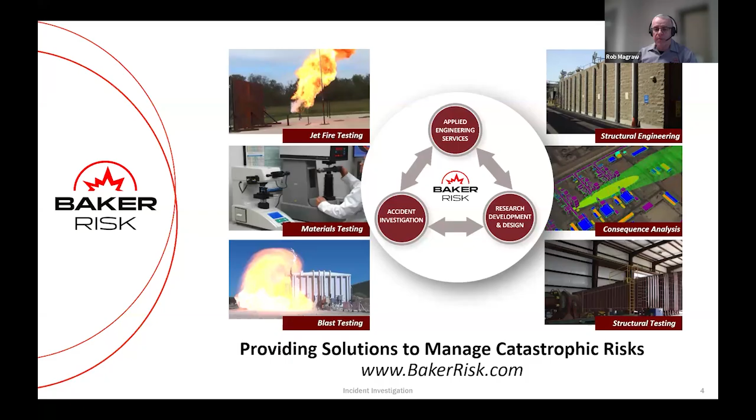Okay, so incident investigation. So the first question is why do we investigate? Why do we need to bother investigating? So we want to demonstrate this by looking at some examples of where things have gone wrong. Often events that get cited are the likes of Flixborough, Buncefield, Piper Alpha, Texas City, etc. But what I want to show here is some more recent events that demonstrate that industries are still having these major accidents on a regular basis.

For the first couple of these examples, BakerRisk personnel were actually boots on the ground investigating what went wrong. So clearly you'll see from these accidents that investigations are still in demand. But the question is, if we're investigating these incidents and they're still occurring, what is it we're missing? What are we not learning from these investigations? And we'll hopefully bring that up as we go through.

So the first event here happened at the Husky refinery in Wisconsin, USA, on April 26, 2018. Now, this event clearly demonstrates how real events in the real world can escalate in unexpected ways that are often far more complex than the simplistic scenarios that we might evaluate for a QRA or even use as the basis for our emergency planning arrangements.

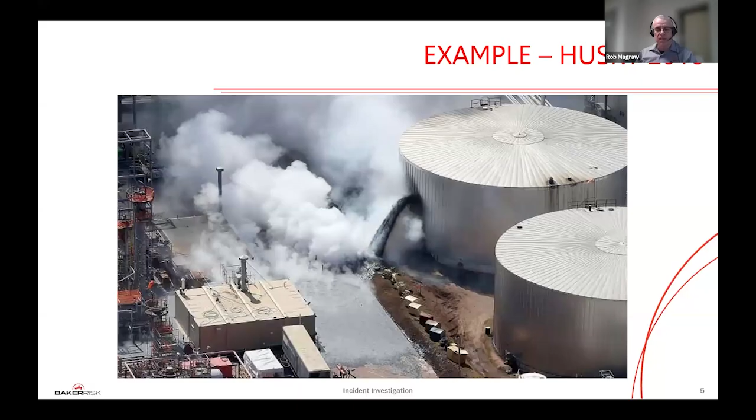So this is a video of the aftermath. Luckily, in this case, there were no fatalities. However, there were 11 OSHA recordable injuries and a downtime of approximately 2 years. The resulting payout from the insurers at the end of 2018 was approaching $500 million. And that covered plant damage, business interruption, and cleanup costs.

The next example we'll look at is Philadelphia Energy Solutions Refinery in Pennsylvania, USA. This was the 21st of June, 2019. And this is another event that escalated. An initial fire resulted in a major explosion. And in this screenshot, taken during that major explosion, you can see a section of process vessel being ejected. That piece of vessel actually landed on the other side of the adjacent river.

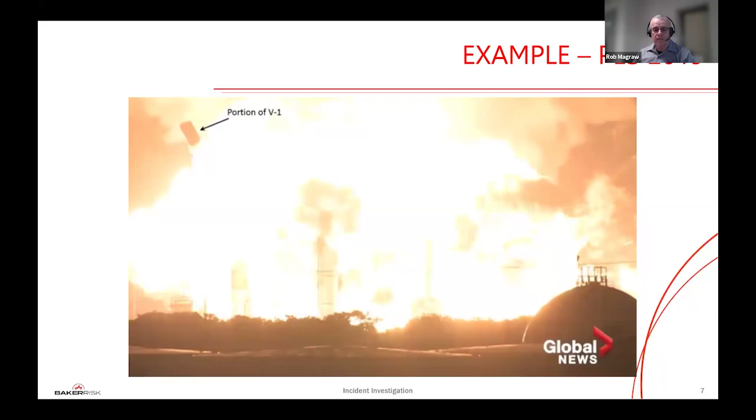So there goes the explosion and the vessel flying out. The consequences of this event, again luckily no fatalities, surprisingly 5 injuries, around $1.25 billion in insured losses, including around $1 billion in plant damage and $250 million in business interruption.

As a result of this event, PES, Philadelphia Energy Solutions, went bankrupt. The refinery was closed, and if you look at the site on Google Earth now, you'll see it's completely demolished, and it's just a flat area. So the impact of these events on the business can be massive, as well as the immediate safety impacts.

Slightly different event. This demonstrates these events don't just happen at production and manufacturing facilities, but actually can occur anywhere that high hazard materials are present.

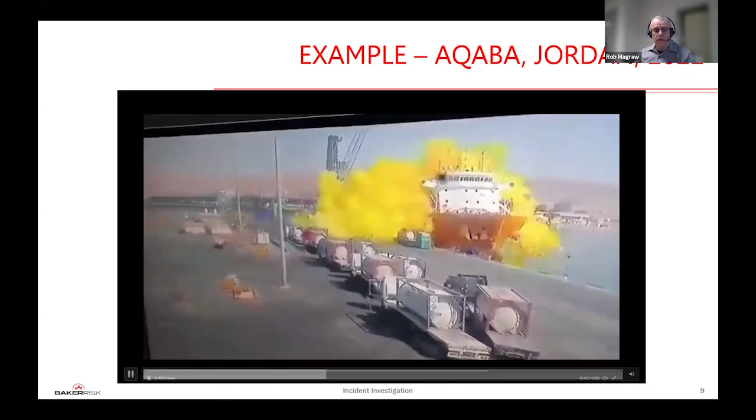Some of you may recognize this. This is the port of Aqaba in Jordan. The event happened June the 27th, 2022. An ISO container, you can see here, is being lowered, containing 25 tons of chlorine. It's being lowered onto the ship. The lifting system failed and it dropped, resulting in 13 fatalities and more than 256 injuries. And what's incredible about this is the speed with which that toxic cloud spreads.

Here you can see the ISO container that fell, and the punctures from landing on the support structure on the vessel punctured a hole in the ISO tank.

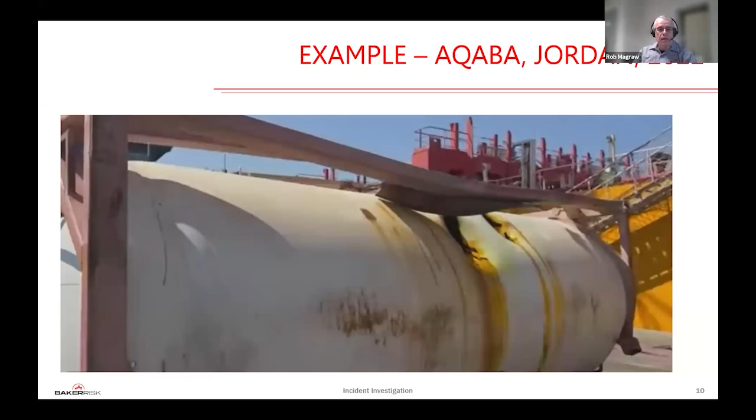An even more recent example includes a major explosion at a chemical plant operated by Shandong Youdao Chemicals in China, May 27th of this year. The details are pretty scant, but it's believed to be between 5 and 11 fatalities, 19 injured, and you can see from the picture major damage to the facility itself and also lots of adjoining facilities as well.

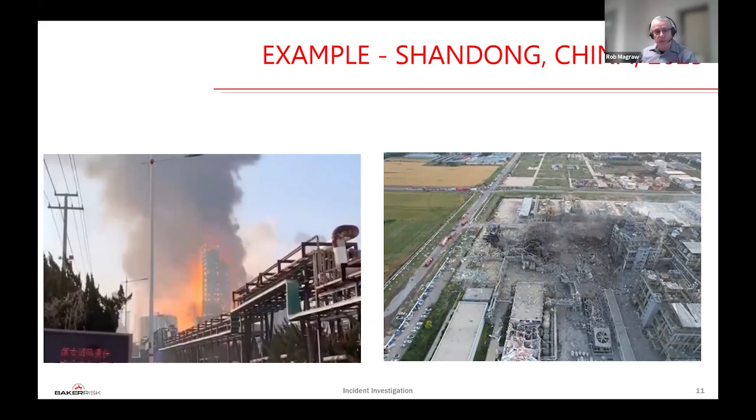Back to the USA. This is Smitty's lubrication plant in Roseland, Louisiana, August 22nd, 2025. And you can see there's a pretty well-developed fire in a tank farm. Took 2 days to extinguish. Just look at that video and look how closely spaced those tanks are and how close the bunding is to the tank. Much cleanup work to do after this event.

So there's a history of major accidents and a continuation of those accidents. So why do we investigate? Here's a list of some of the reasons. It's not an exhaustive list. There are also lots of other things.

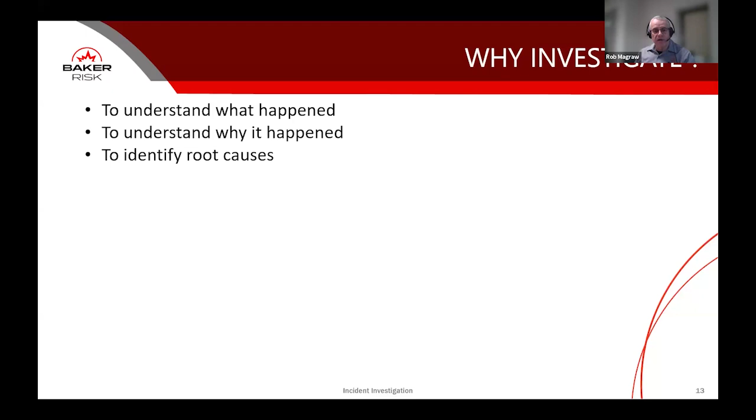First of all, we want to understand what happened. Once we understand what happened, we can look at why it happened. When we understand why it happened, we can identify the root causes behind those immediate causes. And then once we've done that, we can take action to prevent it reoccurring.

This is the most important thing. You can do root cause analysis to the end of time, but if you don't do anything with the results, nothing is going to change. So that's the critical point.

So we can take that learning and we can share it amongst our own organizations. We can share it outside our facility to others in industry. And that learning helps develop the safety culture within the organization to reduce the likelihood of similar events happening in the future.

And the second to last point there, to satisfy stakeholder needs, we will cover in more detail as we go forward. But as I say, there's lots of others in terms of legal, insurance, all those lots of other reasons why you might want to investigate an incident.

So looking at the legal side of things, looking at the European Union first, where we've got high hazard regulation under a directive commonly known as Seveso. We're currently in version Seveso 3. And this directive from the EU must be implemented by all EU member states.

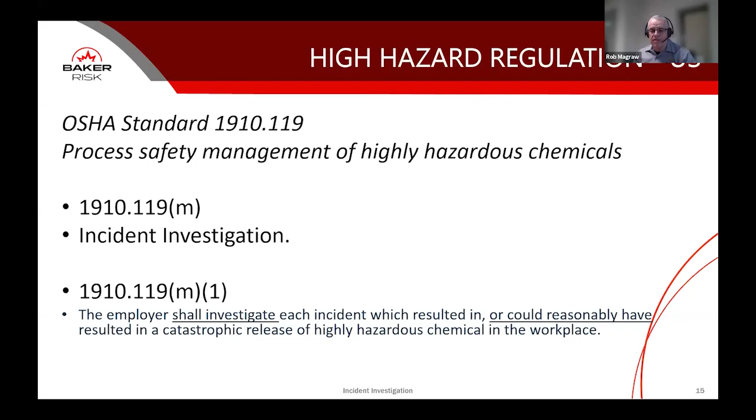So that's European Union. In the US, we've got the OSHA standard 1910-119. This is process safety management. And again, there's a whole section in there on incident investigation. I've just pulled out one clause that says employers shall investigate each incident. And the important thing on this one is that they've said it's not just incidents which have resulted in, but also could reasonably have. So this is putting a duty on the operator to investigate those events that could have resulted in a major accident.

Within Egypt, we've got the guidelines from the Ministry of Petroleum and Mineral Resources on incident notification, investigation, and reporting. Again, we're saying that operating companies shall openly investigate all incidents, preventing recurrence and driving continuous improvement. That same theme runs through all these guidelines.

If we look at what industry groups are saying, this is the risk-based process safety temple diagram from the CCPS, and you can see one of the key things for learning from experience is incident investigation. Other industry organizations, such as the Energy Institute, have a similar management framework - in the EI framework, element 19 is incident reporting and investigation.

So all the legislation and industry good practice are telling us the same thing: if something goes wrong, investigate it, find out what happened, and learn from that investigation.

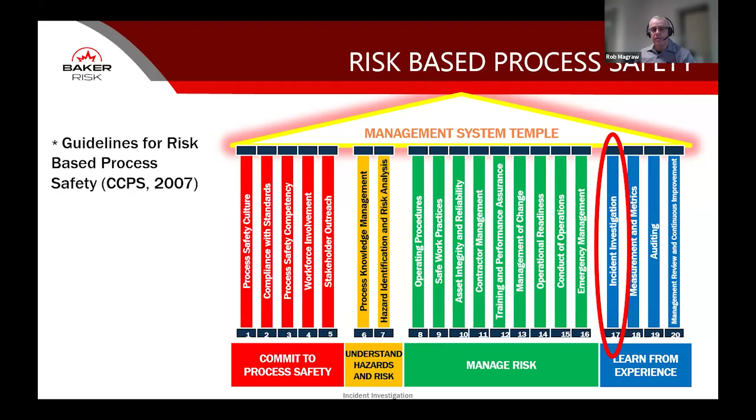Clearly, the operating company, the ones who've suffered the incident - so there might be a site level investigation and a corporate investigation. The owners of that business may be interested. There'll be other affected parties, could be employees who've suffered injuries. Similarly, contractors and third parties - any parties who may have been directly or indirectly involved in the event.

You've then got authorities - those with some sort of regulatory or oversight role, local authorities in the district where this happened, your regulatory authorities, and the emergency response organizations that may have responded to the event.

Clearly, at some point, insurers will probably be asked to contribute towards the loss, so they are going to be interested in what happened and why it happened. And then there are others - lawyers representing various stakeholders. If you've had a piece of equipment that is part of a licensed process, then the organization that licenses that is going to be interested in what happened and why, and many others, such as trade associations who may want to share information with others about that type of equipment or how to operate it, or not operate it.

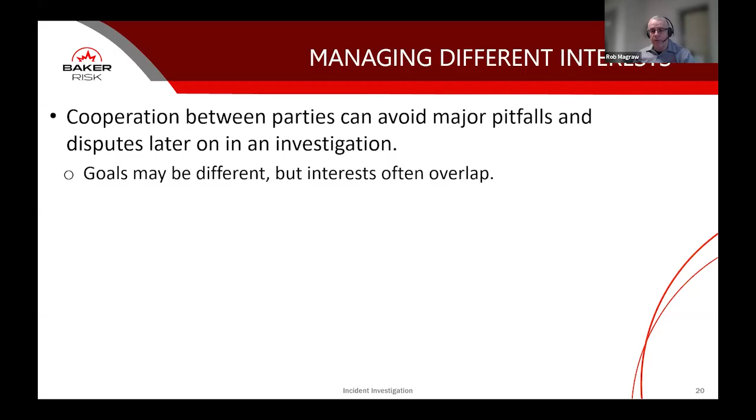One of the key things here is to develop a protocol - one that may help with complex tasks such as testing functionality of a piece of equipment, dismantling, or removing evidence from the site to somewhere else. Developing a protocol between interested parties can help clear blockages in those investigation processes.

So that is a very brief run through of why we still continue to need to investigate accidents, who the stakeholders might be, and what some of the pitfalls are. I'll now hand over to Roger, who will walk through the actual process and an example.

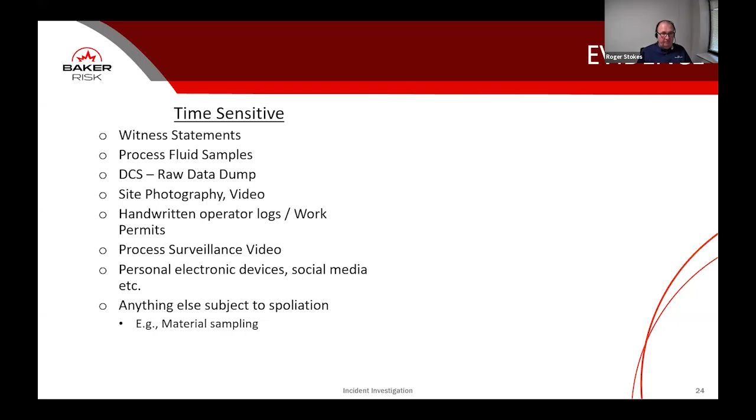Samples of fluid, data from the computer - sometimes you lose it very quickly, which can be a problem. The photography on the site and video, same issue. Handwritten logs, work permits, surveillance video, etc. So all these things could be time sensitive.

You might have other stuff that's not as time sensitive, so photographs and video that can be preserved, data on the computer - but beware, it's amazing how many investigations I find where the data's written over in weeks or a month. Bits and pieces - preserve them, make sure we can take them and analyze them without them suffering from other deterioration. Records from labs and all the engineering data that we're all familiar with.

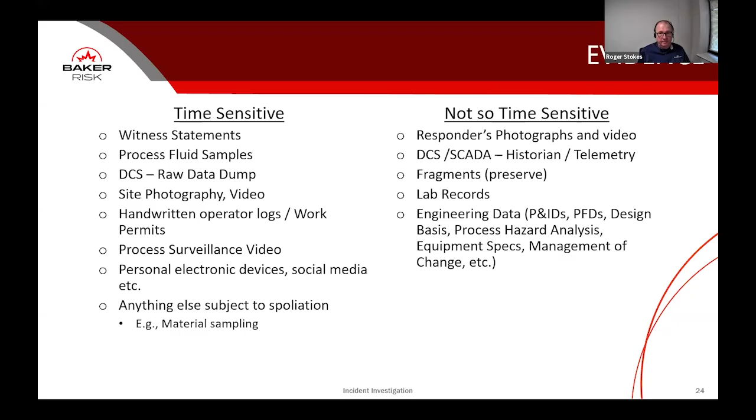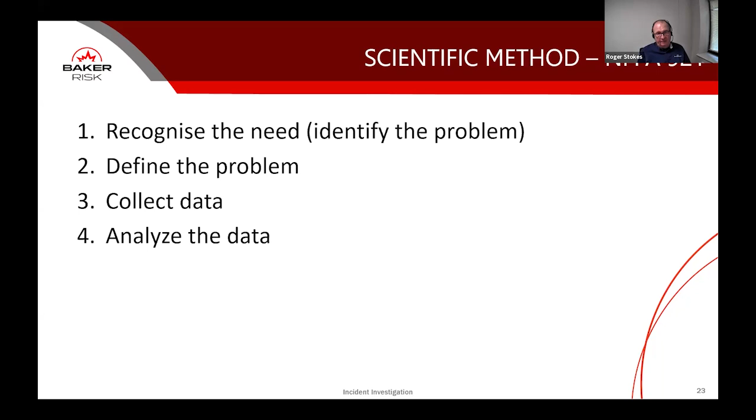The scientific method for investigations is based on NFPA 921, which starts off by saying, what's the need? What's the problem here? Let's define it. And then let's collect data. We then analyze the data we've collected, and then we develop a hypothesis called inductive reasoning - what could have happened, what may have led to this occurring?

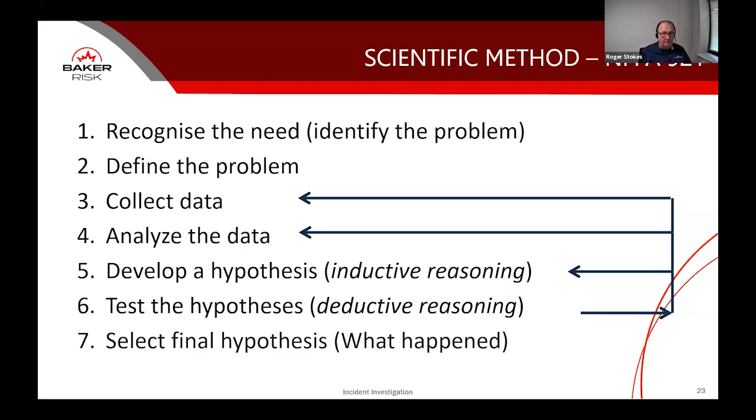There might be several hypotheses to start with, and then we need to test them. What do we need to demonstrate that this hypothesis could have occurred, or indeed might not have occurred? Let's test these, and we might come down to only one possible hypothesis - it might be two or three, that's not always the case. But there's feedback loops as we develop and test hypotheses - we might again get more data which we look at, and so forth. That's the scientific method. And of course, at the end, we then select the final hypothesis.

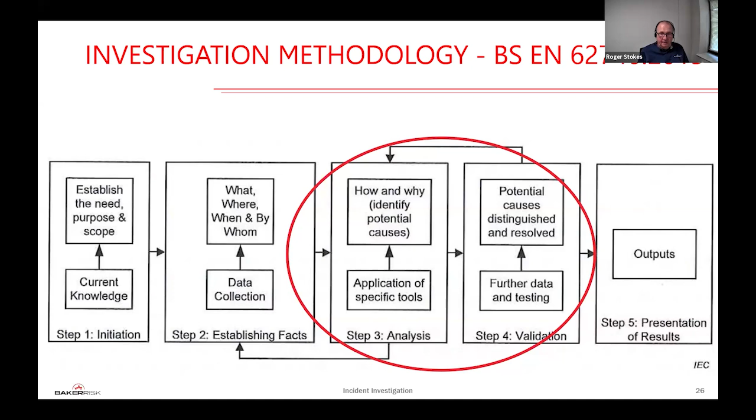This is another slide, the British Standard. It's a similar approach, using specific tools to identify the cause and using data to test that.

There's various terms for cause. I won't read through all of these in detail, but there's an immediate cause, and I think the third definition there is probably pretty good - the final act in a series of provocations that leads to a particular result. So the last thing that happened before it went bang - the pipe burst, the valve opened, whatever it is.

Then we have the underlying cause or causal factors, which could be defined as unsafe acts or unsafe conditions. It's something that contributed to the incident but wasn't the final event. So it could be system or organizational procedures, tests not carried out, etc.

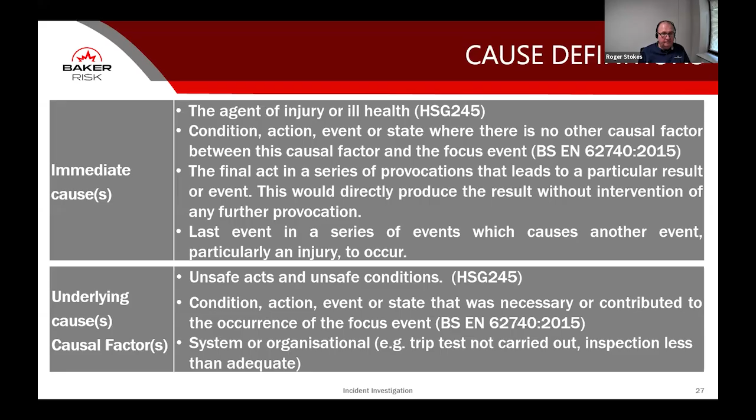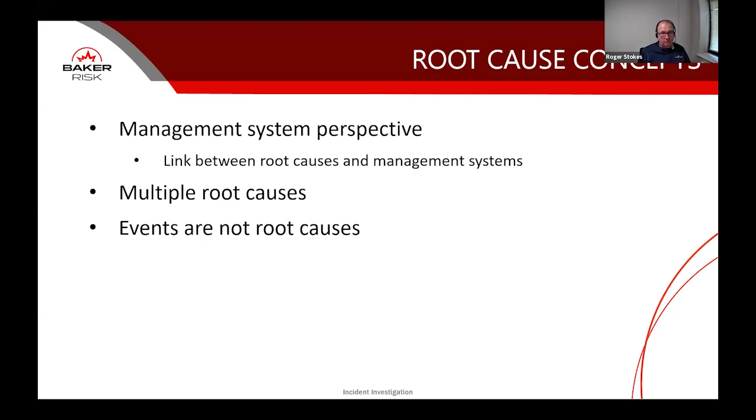So the root cause, the concept of root cause, it's a management system we're looking at, and there are usually multiple root causes. Remember, an event is not a root cause.

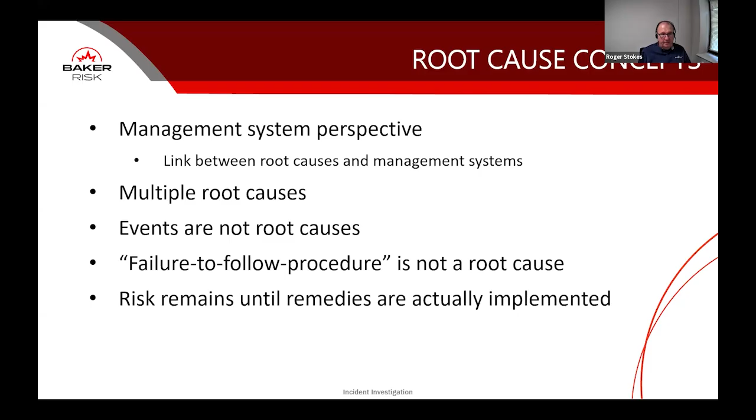Failure to follow procedure, for example, is not a root cause. Why didn't he follow the procedure? What are the systems behind that? And of course, the risk stays there until we've implemented the remedies.

So various methods to get to root cause. There's the 5 whys - you keep asking why until you run out of whys. There's a fishbone diagram, which gives you cause and effect. There's various forms of structured root cause analyses. It could be a logic tree or perhaps a predefined tree. One example is Taproot. BakerRisk has got a system called CATree, and there are many others.

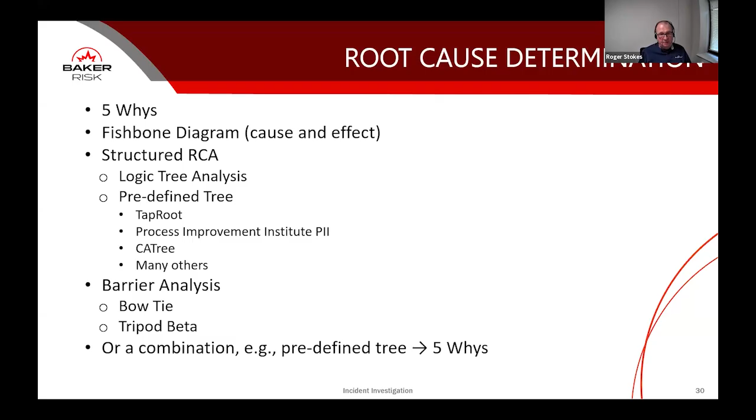Increasingly these days, we consider barrier analysis. What are the barriers? Which ones should have stood up? Which ones failed? And there's methods like Bowtie and EI's Energy Institute's Tripod Beta to look at that. Or you can use a combination. There's no firm rules on which system you use. You might have a combination, so you might have a predefined tree and then start asking whys beyond that.

So this is the case study. It's made up for this presentation. It involved an explosion and fire at a chemical plant, and we start with the timeline.

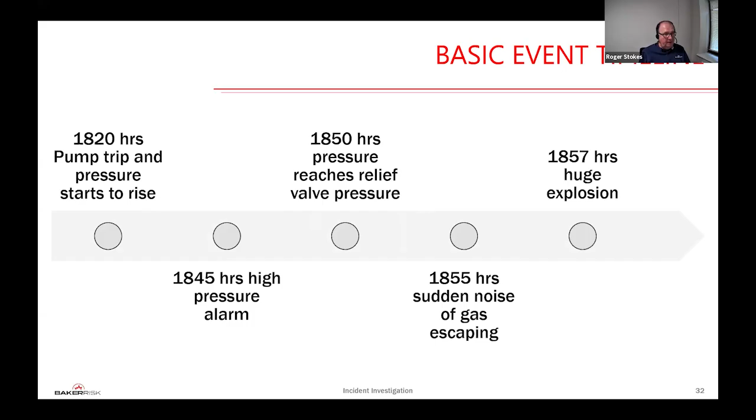So here we have a pump that tripped, followed by a high pressure alarm. The pressure goes up and reaches the relief valve pressure, and 5 minutes after that, there's a sudden sound of gas escaping, and 2 minutes after that, there's a huge and devastating explosion.

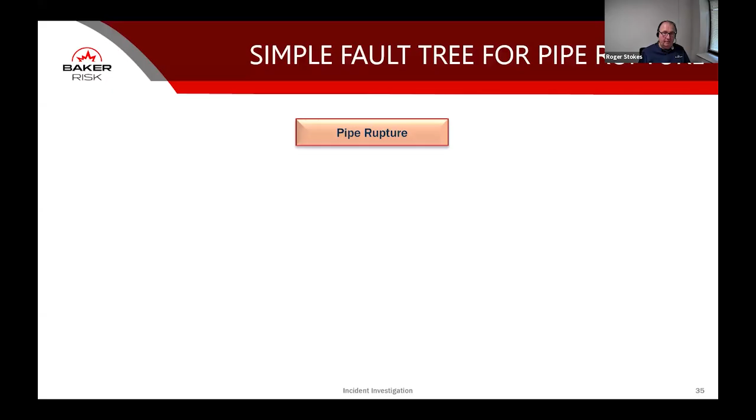But if it was a pipe failure, pipe rupture, let's look at a simple fault tree for analyzing that. We know we've got the pipe ruptured. We also know that the pressure went higher than normal, and that was because the pump tripped. But normally that shouldn't lead to a pipe rupture. There must be something else going on here.

So we start putting together our hypotheses. What might have caused this to happen? And this is one way of doing it, putting together a hypothesis matrix.

So the scenario we're looking at, maybe the pressure went too high. It exceeded the burst pressure of the pipe. And to verify that, you'd look at the records from the computer. You may do a metallurgical inspection of the pipe. And then you hypothesize, you look at your findings and you decide whether that's valid or not.

There might have been a loss of internal wall thickness. You do a metallurgical inspection to validate that. It could have been external corrosion. Again, do some metallurgy. Somebody might have put the wrong pipe materials in. That happens all too often. Could have been hit by a passing vehicle.

Let's look at the evidence of the pipe. Let's look at where vehicles were. There might be some security camera. Something fallen on it and caused it to rupture. Somebody accidentally cut into it. Let's look at the work permits and maintenance system. And then we look at all of this, so we'd analyze it.

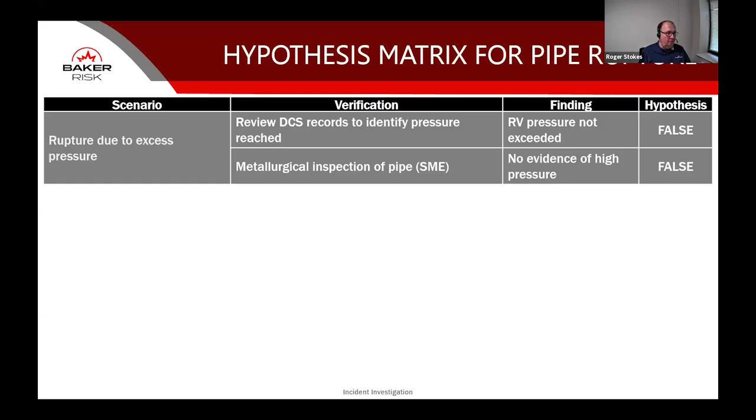So in this example, let's look at the rupture due to excess pressure. If we go to the findings column here, we find that the relief valve pressure has not been exceeded before the pipe ruptured. So it was within its design pressure. There's no evidence of high pressure being the immediate cause.

What about internal loss of wall thickness? We looked at the pipe. Yes, we had a loss of wall thickness due to corrosion. So that's one valid hypothesis.

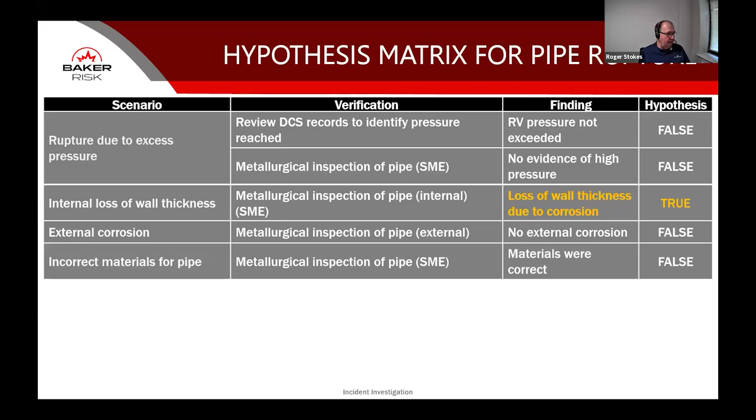What about external corrosion? No, there wasn't any. What about the materials of the pipe? Yep, they were correct, so it's not that. Was it hit? No, there was no sign of it being hit. Anything drop on it? No. So in this case, we've gone through and found one hypothesis which is valid - we've lost wall thickness on the inside of the pipe due to corrosion. Oh, sorry, last one - nobody accidentally cut into the line.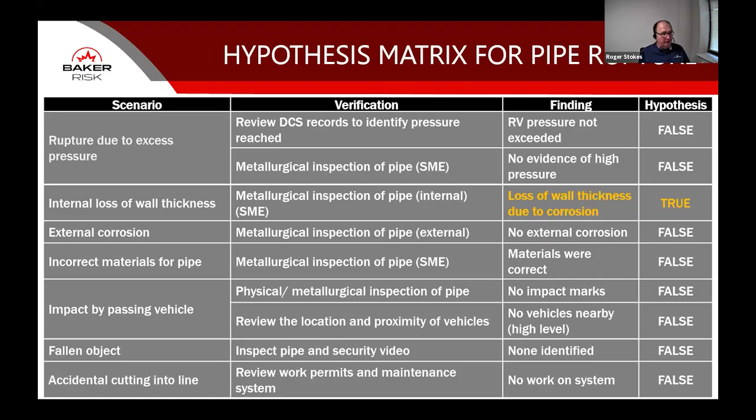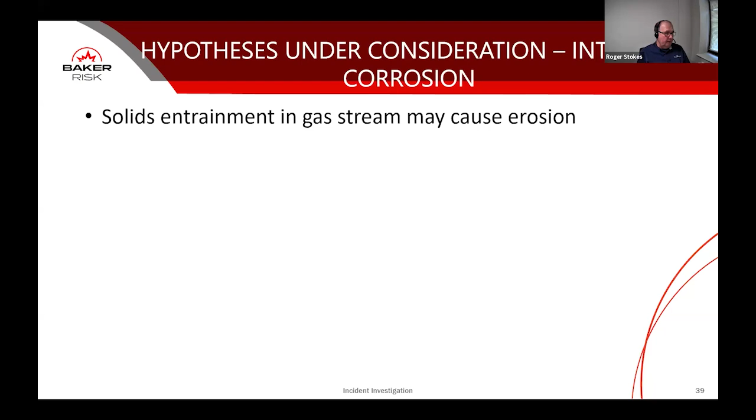So we have internal corrosion. We start asking, well, why have we got internal corrosion? It could be solids entrainment in the gas stream - that could be one hypothesis. It might be high moisture. It might be high temperature. It could be liquids accumulating at a low point. Maybe the thickness checks weren't accurate enough.

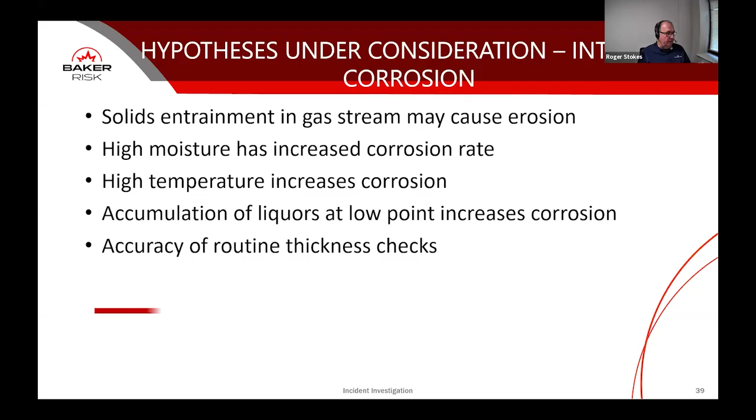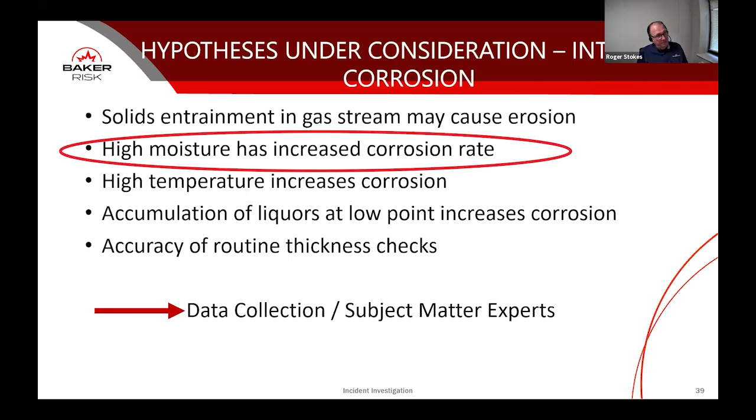So we look at all these hypotheses. We collect data, we go through, discuss it perhaps with subject matter experts. And we find actually here we have a situation where it was indeed high moisture that increased the corrosion rate.

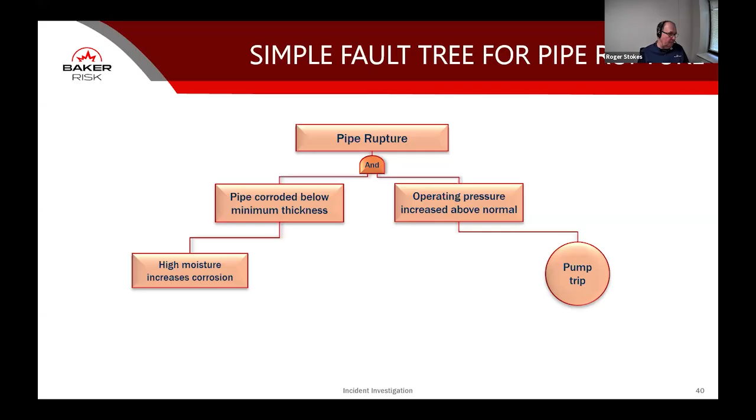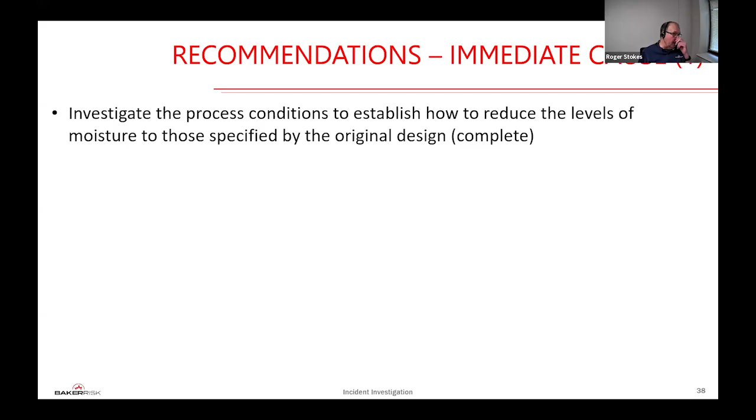So if we go back to our fault tree that we had earlier, we now know that the pipe corroded below minimum thickness, and this was as a result of high moisture. And so the recommendations you might make from that investigation so far would be to find out why we had high moisture, and look at and make sure and then reduce the levels of moisture to those specified by the original design.

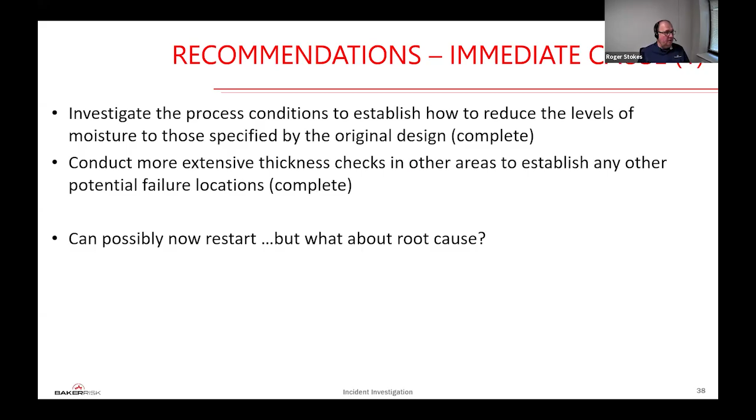We might then conduct more extensive thickness checks in other areas to see if there's any other possible failure location. And once we've done that, and maybe we can restart. We've repaired the pipe. We've checked everywhere else. We've reduced the moisture levels to the original design. But what about the root cause? We haven't got to that root cause at this stage, and there is another leg on the fault tree.

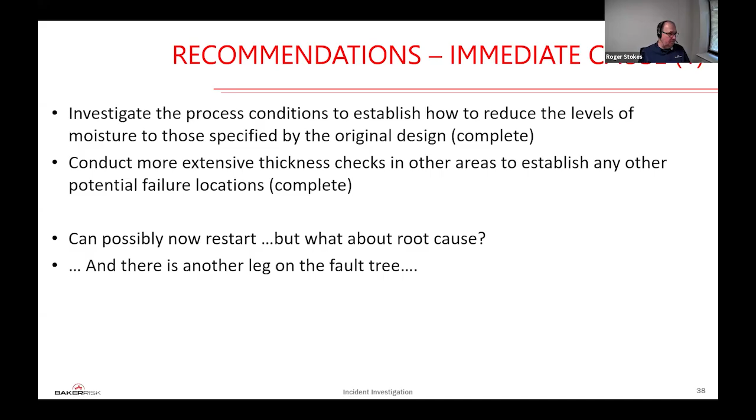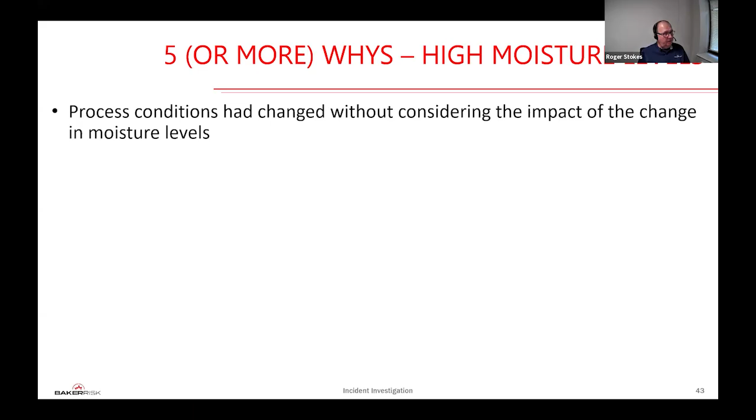So we start asking, why is the moisture level high? Well, moisture level is high because the process conditions were changed slightly, and we didn't consider the impact of the change in moisture levels on the piping. We then find that the management of change system wasn't used. And this change was made by a new engineer who didn't know about MOCs, and that for when an operating temperature was changed just very slightly.

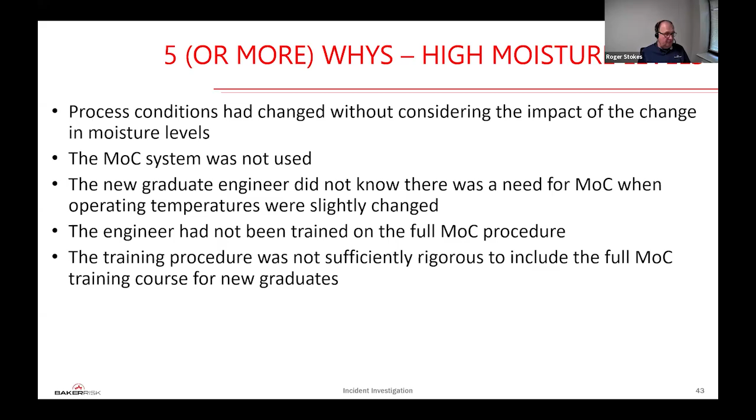And then we find that he's not been trained on the MOC procedure. Why wasn't he trained on the MOC procedure? Well, it wasn't sufficient. The training procedure for new graduates didn't include the MOC training course. And then at more of a management level, they hadn't audited the training procedure for 10 years. And that was because the management audit process didn't include the need to review the training procedure. So we're really getting to the bottom of this now.

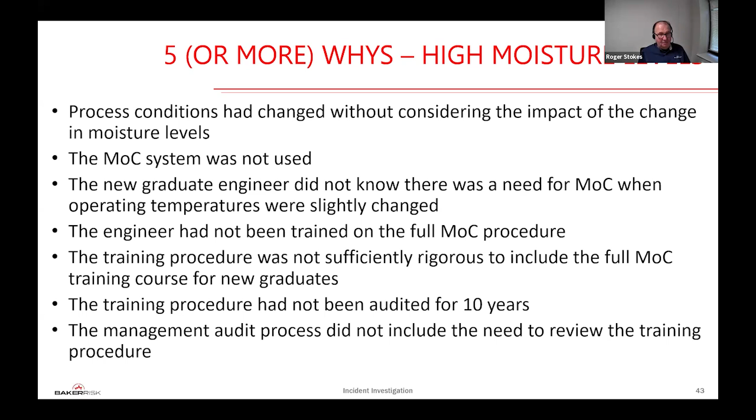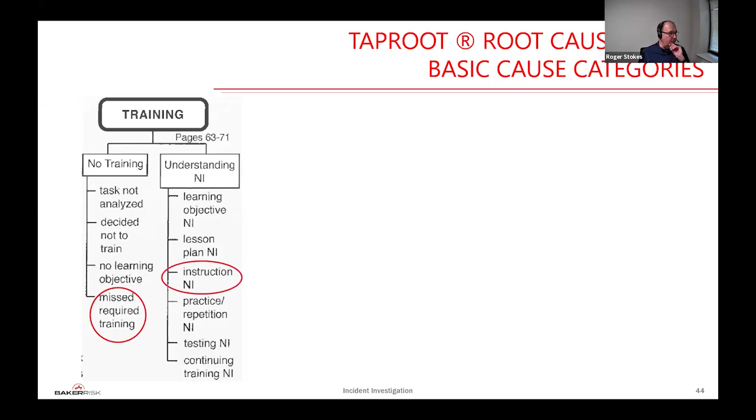So one of the methodologies I mentioned earlier is TapRooT. So we'd go through a structured tree, and we'd look through the various potential causes. And in this case, there's training involved where we missed the required training, and the instruction for MOC training needs improvement. The NI needs improvement.

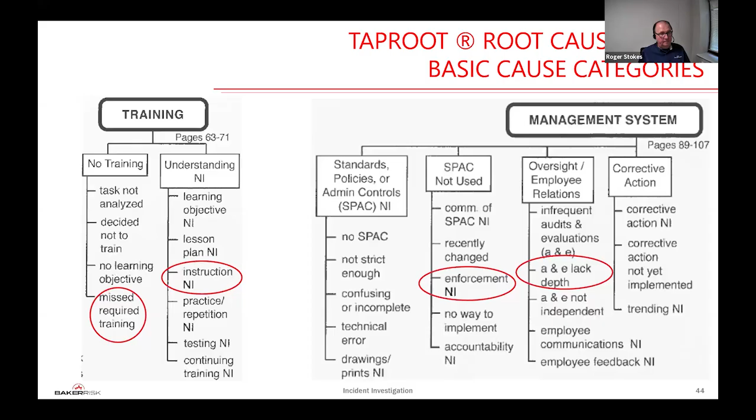We also found on the management system that the standards, policies, or admin controls were not used. So we had a policy for MOC, but it wasn't enforced. And then the other circle here is around the audits and evaluations were inadequate. It lacked depth.

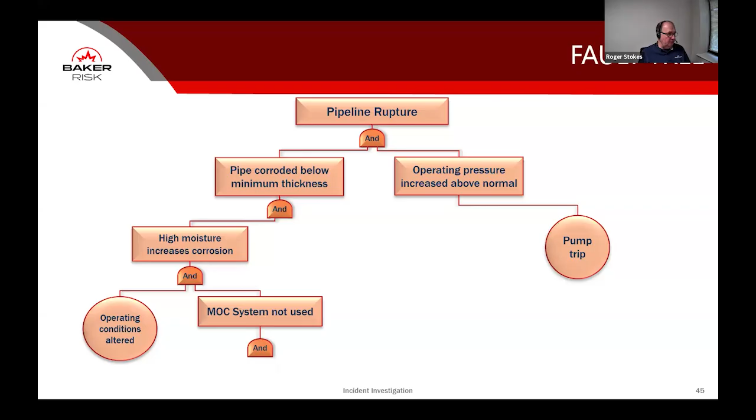So we go back to our fault tree. Okay, high moisture increased the corrosion. We know operating conditions were altered, and we didn't use the MOC system. And there's reasons behind that we've just discussed. But we also found that the condition monitoring hadn't identified the increase in corrosion. And then there's a whole new leg on the fault tree where we start looking into asset integrity.

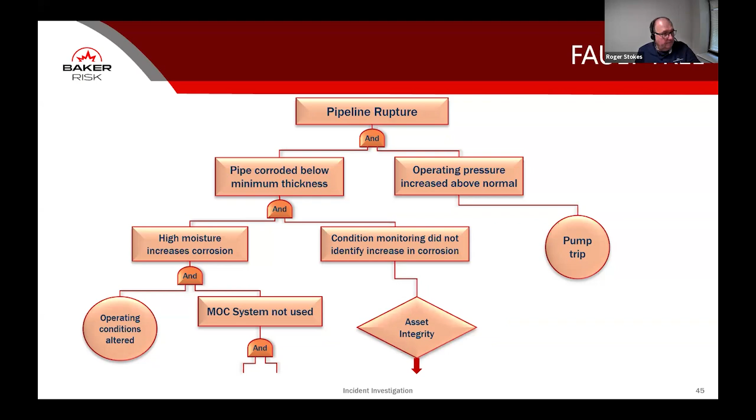So back to our hypotheses. What are the potential reasons or causes of failing to detect the increased corrosion? One could be maybe the corrosion rate's gone up rapidly since the last measurement. We know the moisture levels have gone up, but, so that's one possible cause.

The other one is other possible scenarios that historic measurements weren't conducted correctly. So let's review the system for measuring wall thickness. Maybe the data analysis of that historic measurement, those historic measurements was incorrect. So let's try and replicate the analysis and compare it with the site figures.

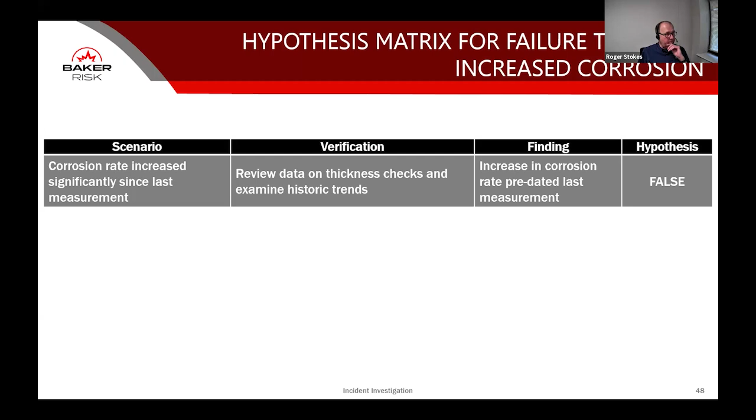So we carried out the analysis, and what we found was that the corrosion rate hadn't increased significantly since the last measurement, so that hypothesis was false. We looked at whether they were conducted correctly, and we found that they were good. They did the correct, used the correct method and produced the correct results for thickness. But then we found, unfortunately, that the analysis of those historic trends was incorrect, and we replicated it, and we found that the analysis they had did not use the highest rate of metal loss.

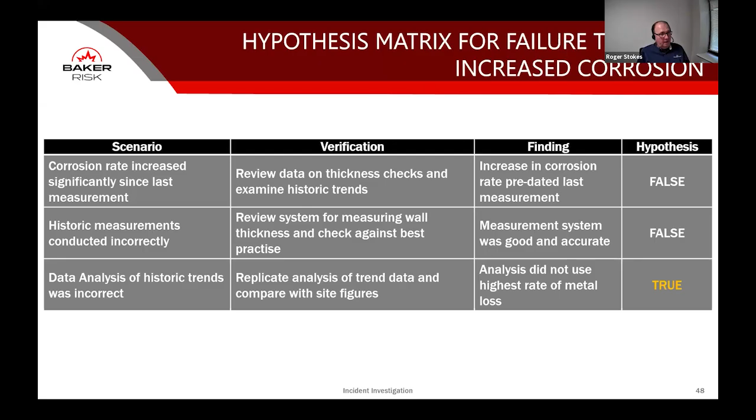Here's the thickness history. So the columns, these are the dates. So in 2000, we measured 3 different points, about 15 mil thick. In 2010, arguably a bit of a big gap, but not much loss, with some loss of thickness.

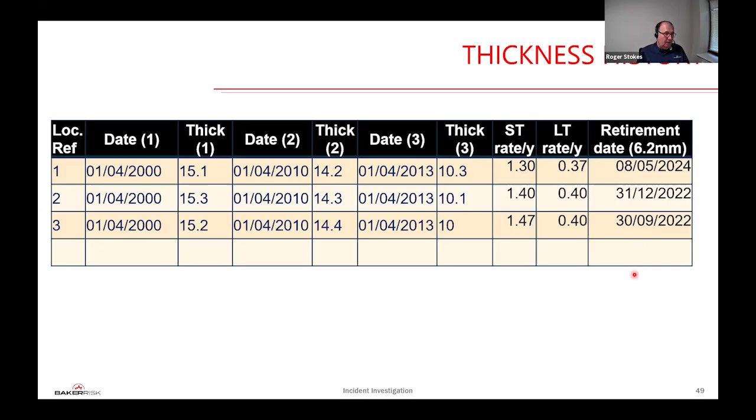2013, lost a fair bit more. And of course, you can calculate the rate of thickness loss on a short-term or a long-term rate. So the short-term rate of thickness loss, 1.3, long-term rate was 0.37. They used the long-term rate, and the retirement dates calculated down to a minimum 6.2 millimeters, well beyond where we were. So we had plenty at the time. We had plenty of operating life left.

So this just tries to depict it. Here we've got the wall thickness up this side. The retirement thickness is along this line here, and these are the years of operation. So it started off a little bit loss of thickness, then it was pretty stable for a number of years, then increased. So the system effectively looked at the very first data point and the most recent one to calculate a retirement year in year 22.

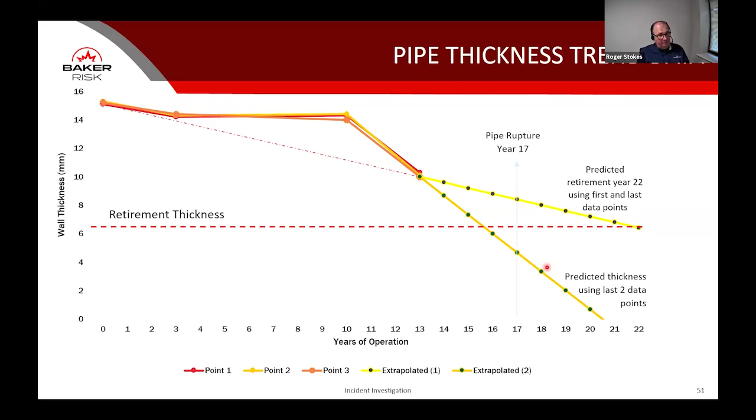But of course, what they should have done is look at the highest rate of corrosion, in this case using the last 2 data points, which actually predicted a much quicker rate of metal loss. And in fact, it was almost consistent with the year of rupture.

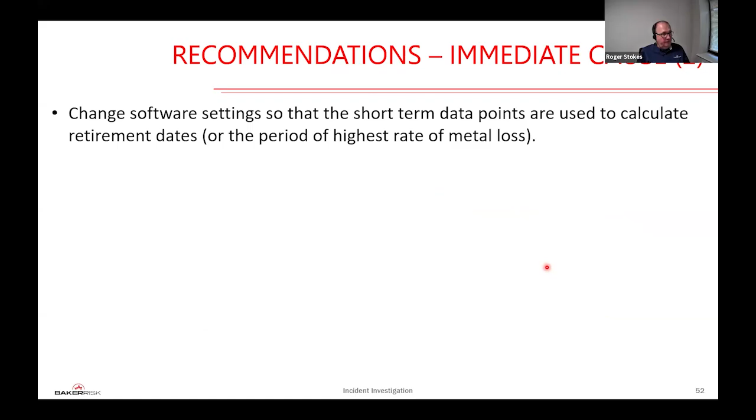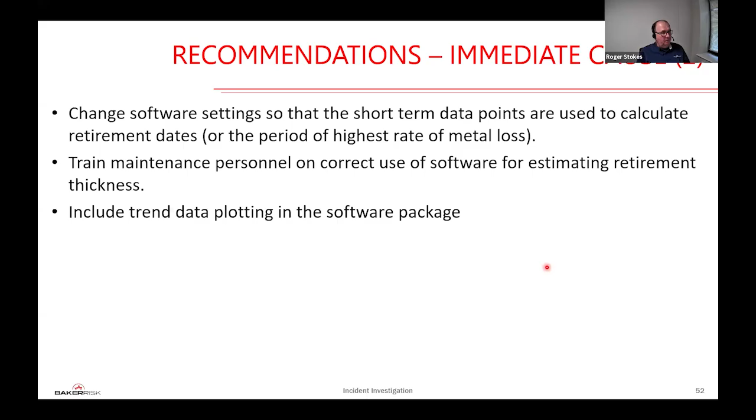So we have a number of recommendations for the second immediate cause. The software settings were wrong on the computer program that calculates retirement dates. But we find that the maintenance personnel needed to be trained. The trend data wasn't visible, it wasn't visual, it was just numbers. So a plot of it would be pretty helpful, like I've just done.

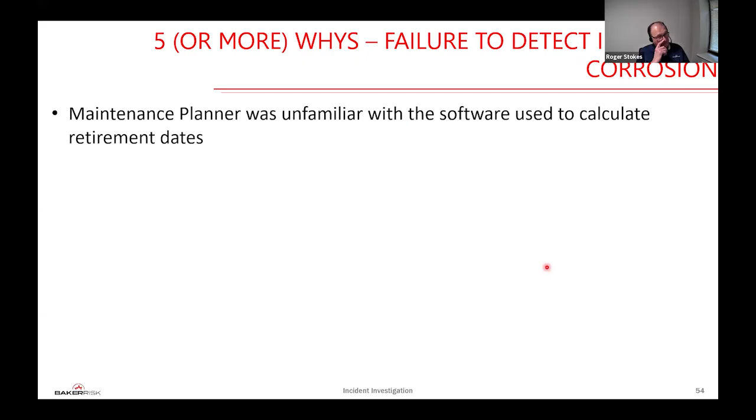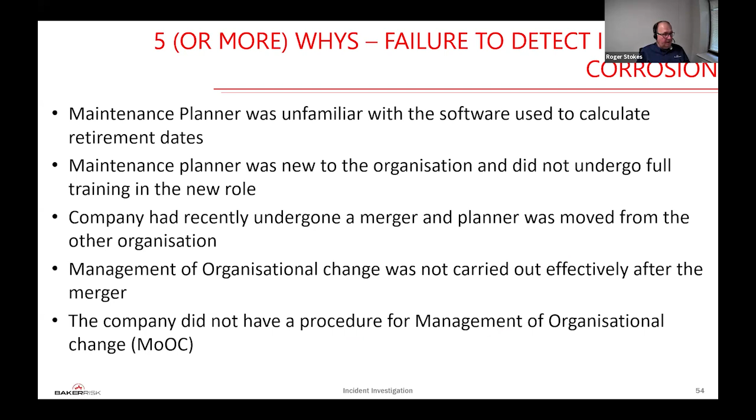But we also have on the second root cause, why didn't we detect this? Well, the maintenance planner didn't understand the software properly. He was new and hadn't gone through full training; the company had recently merged, and the planner was moved from a different organization. The management of organizational change wasn't carried out effectively after the merger. And we then found that was because they didn't actually have one. They didn't have a procedure for management of organizational change.

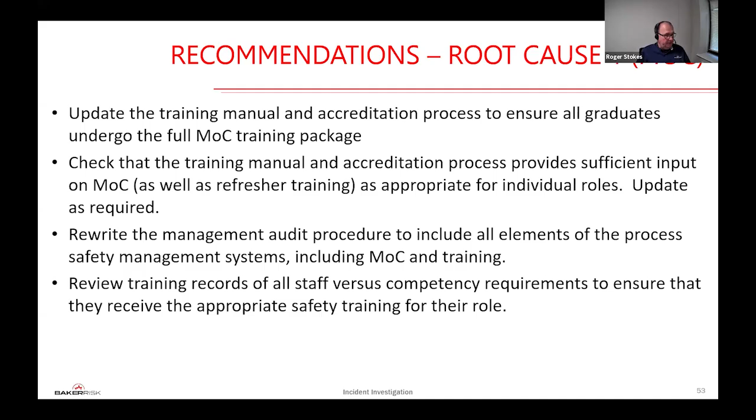So recommendations for the first cause, which was the straight management of change, changing the operating conditions, was to update training manuals, make sure graduates go through the full training, make sure MOC is there on refresher training as well, and have a better management audit system to make sure we audit the MOC and the training process, and make sure the training records of staff are good enough, and we can see the competencies they have and what they need.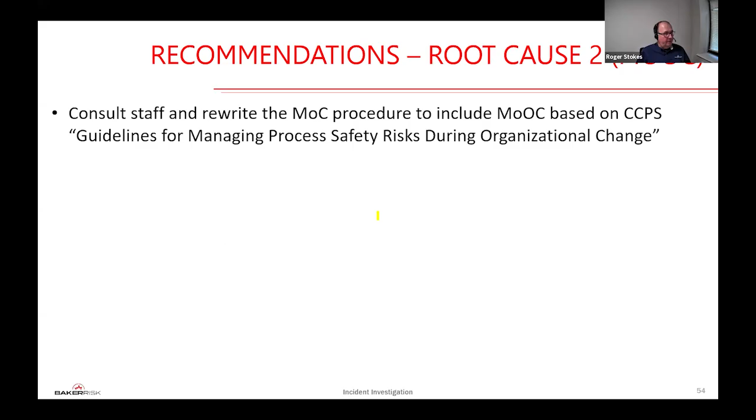So for the second root cause, the organizational change issue, well, let's include that in the MOC procedure, and update the training manual and train the staff appropriately. And of course, the generic root cause is connected with management of change. So from this incident, the lessons learned were about management of change, and many of the incidents are, in fact. So make sure people know about the MOC system and management of organizational change. Make sure the training procedures are good enough around the company.

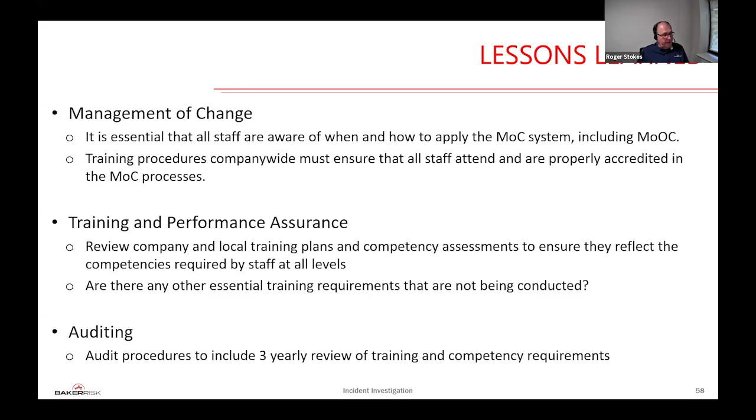Training and performance assurance. So what are the local training plans? How do we assess the competencies? Are they reflected in what the staff know and understand? And are there any other essential training requirements that we've missed and need to be conducted? And then, of course, auditing. We need to improve our management auditing process to make sure we look at the training and the competency requirements.

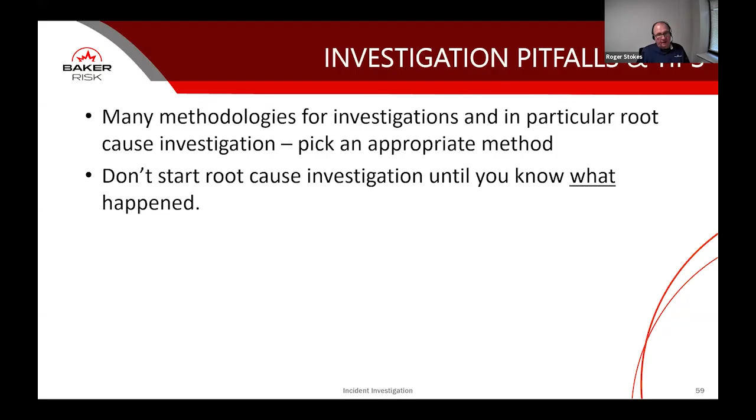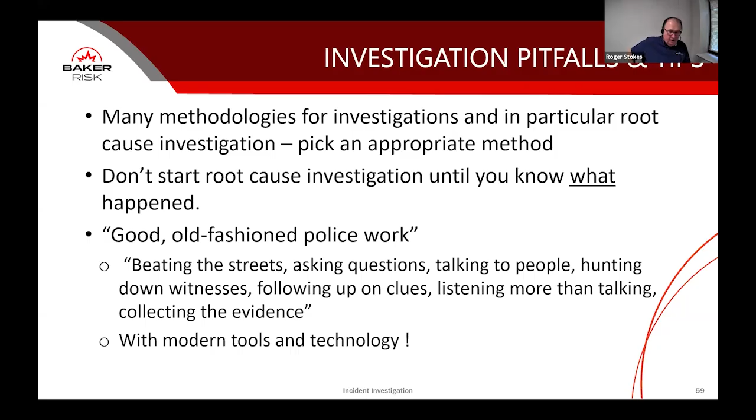So just a slide here generally on investigation pitfalls and tips. There are many methodologies around. Don't be forced down one because somebody says use that. Try and pick an appropriate method for the incident that you're dealing with, and don't start root cause investigation until you know what has happened, as Rob said at the start. A lot of it's good old-fashioned police work, asking questions, talking to people, finding out what happened, not assuming anything. And of course, these days we've got a lot of modern technology we can use, but we've got to be aware of it as well.

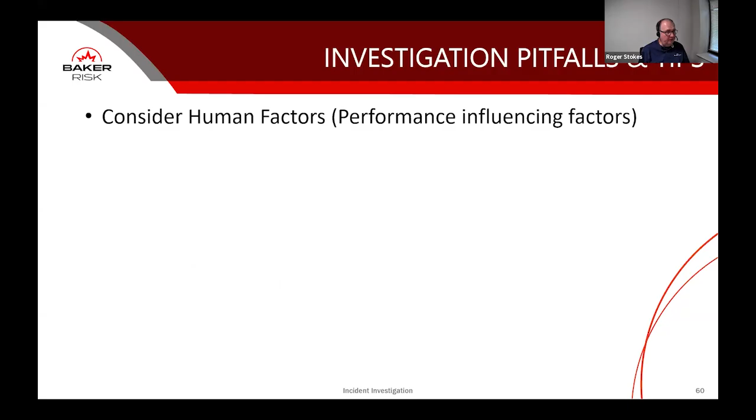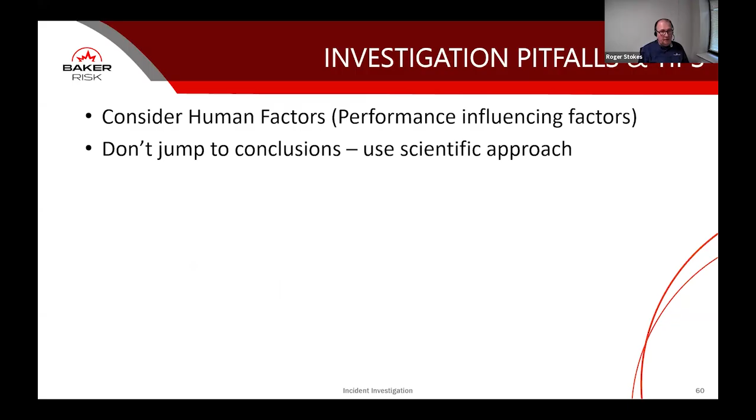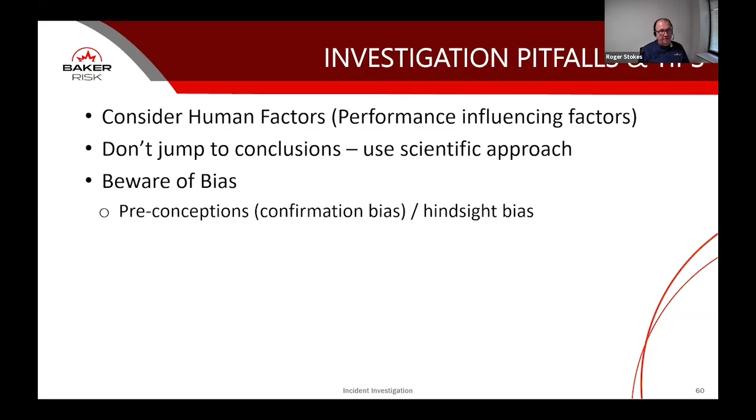And we mustn't forget human factors. So this is performance influencing factors that can affect the barriers that prevent these incidents from occurring. Don't jump to conclusions. Using the scientific approach makes you think outside the box and look at other possible causes, because we want to try and remove bias as best we can. Oh, this happened last week. I know exactly what happened this week. Oh, this happened last year. Oh, you shouldn't have done that. That was a silly thing to do. All these things need to be considered.

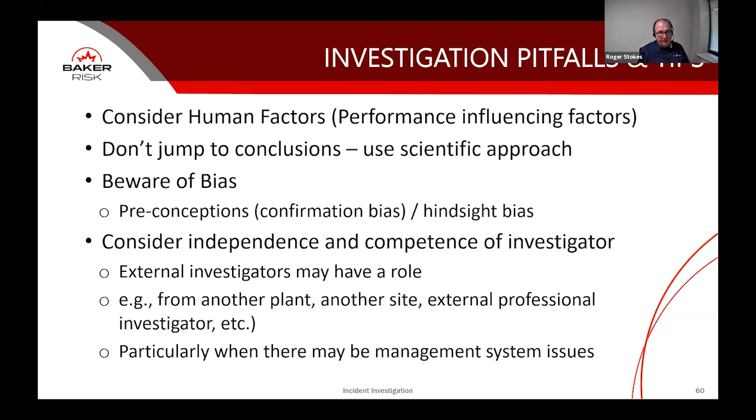And you might want to also consider the independence and competence of the investigator. So BakerRisk conducts incident investigations. Sometimes, if it's a big incident or there's potential wide learning, it might be better to do it externally rather than internally. So external investigators may have a role. It could be somebody from another plant, or another site as well. But where there's management system issues, you sometimes need an external view to appreciate the problems.